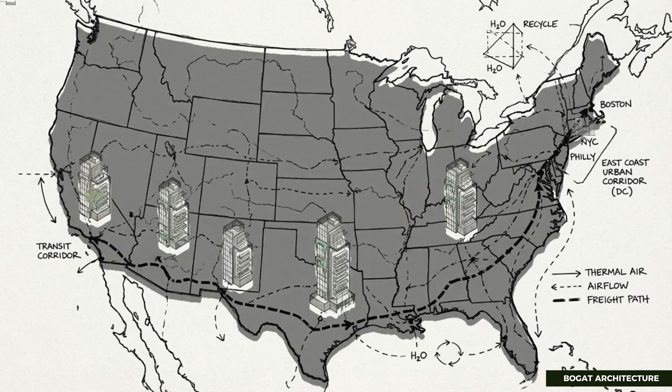Right now, our food system is stretched thin, relying on vast amounts of arable land that is rapidly degrading, and a transportation network that ships produce thousands of miles before it reaches your plate. We are running out of horizontal space, but as architects, when we run out of space on the ground, we look up. What if the skyscraper of the future wasn't just housing or offices? What if our buildings could feed us?

Today, we are looking at one of the most provocative shifts in urban design history, the rise of the vertical farming city. Hi, I'm Maria, an architectural designer and founder of Bogat Architecture and Design, and today we'll explore vertical farming cities feeding future generations.

So, to understand why this architectural typology is so critical, we first have to look at the flaw in our current urban design. For the last centuries, city planning has been defined by separation. We have residential zones, commercial zones, and industrial zones. Agriculture was pushed far to the periphery, out of sight and out of mind. This separation has created a massive logistical burden.

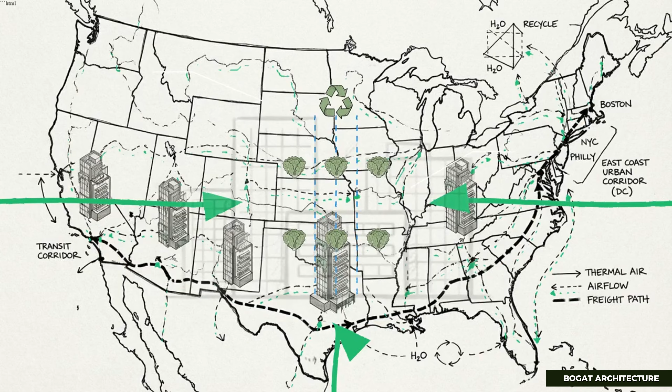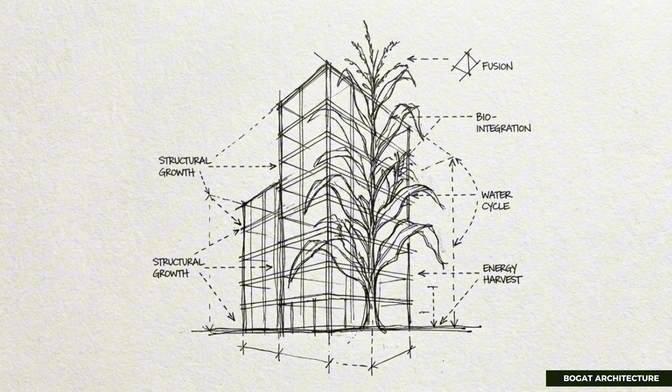The average head of lettuce in the United States travels 1,500 miles to get to the consumer. That is a tremendous amount of fossil fuel, packaging waste, and spoilage. From a design perspective, our cities are consumers. They devour resources like food, water, energy, and they export waste. They are linear systems. The concept of vertical farming is an attempt to turn the city into a circular system, something that acts more like an ecosystem.

We call this agritecture, the seamless fusion of agriculture and architecture. It's not just about putting a few tomato plants on a balcony. It's about integrating high-yield, industrial-scale food production into the structural DNA of our high-rises. It challenges us to rethink the purpose of the building envelope and the mechanical heart of our structures. But before we talk about the building itself, we have to understand the technology inside, because form follows function.

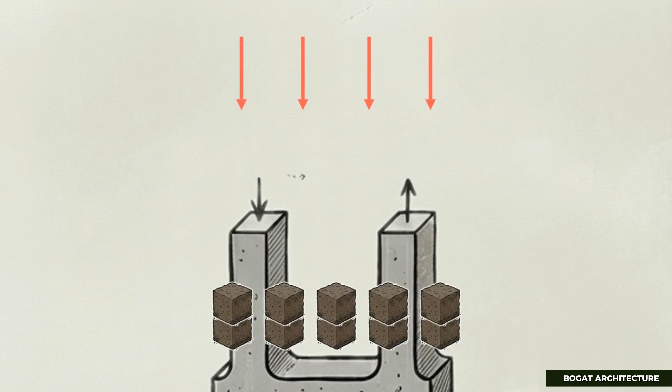If we are designing a vertical farm, we aren't using dirt. Soil is incredibly heavy. Saturated soil can weigh from 100 to 120 pounds per cubic foot. If you tried to fill a 40-story skyscraper with 3 feet of topsoil on every floor, the structural requirements would make the project financially impossible. Instead, we rely on 3 main methods, each dictating a different architectural approach.

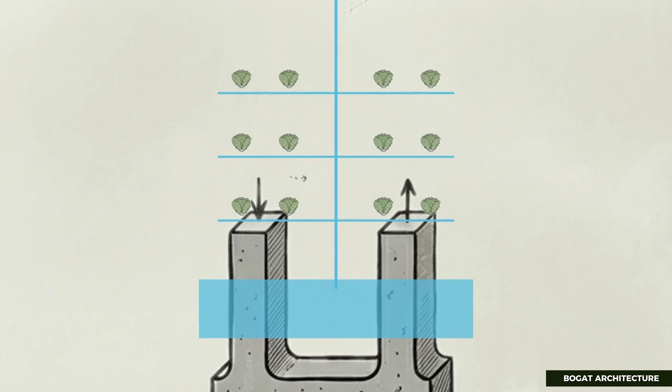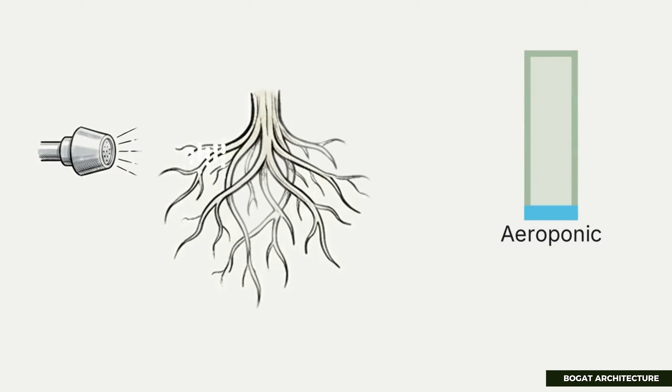First, there's hydroponics. This is growing plants in nutrient-rich water. From a design standpoint, this means the building becomes a massive plumbing system. We're dealing with pipes, reservoirs, and pumps on every level. Second is aeroponics. This involves misting the roots of plants suspended in air. It uses 95% less water than traditional farming, which significantly reduces the dead load on the building structure. However, it requires sophisticated humidity control systems.

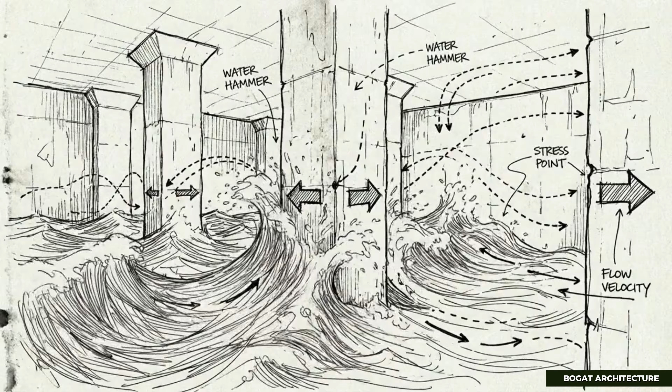Third is aquaponics, a symbiotic system where fish produce waste that feeds the plants, and plants clean the water for the fish. This creates a live load issue. Water tanks are heavy and they move, so you need reinforced concrete slabs and careful distribution of weight.

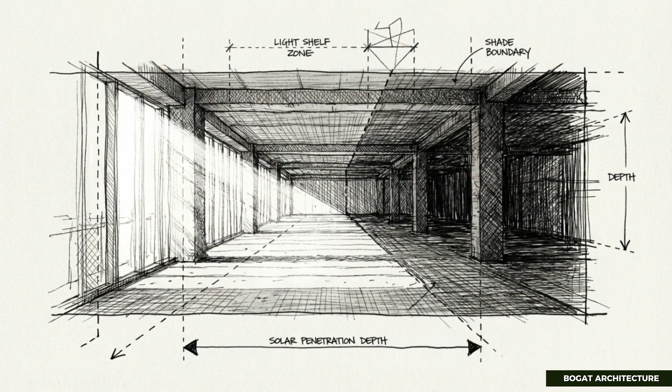Now let's put on our architect hats. The biggest challenge in designing a vertical farm isn't the water, it's the light. In a traditional field, the sun does all the work for free. In a skyscraper, we have a geometry problem. Most commercial towers have deep floor plates. The distance from the window to the core might be 30 to 40 feet. Natural light only penetrates about 15 feet into the building effectively.

If we rely solely on glazing, glass facades, only the crops on the perimeter will grow, and the crops near the elevator core will die. So we have 2 architectural solutions here. The first solution is to change the shape of the building. We can design narrow towers or towers with high surface area to volume ratios.

Think of shapes like a thin rectangle, a cylinder, or even a cross shape; it maximizes natural light penetration. The second solution, and the most common one currently, is a closed system relying on artificial lighting where we use LED spectrums, pinks and purples that target the exact photosynthetic needs of the plants.

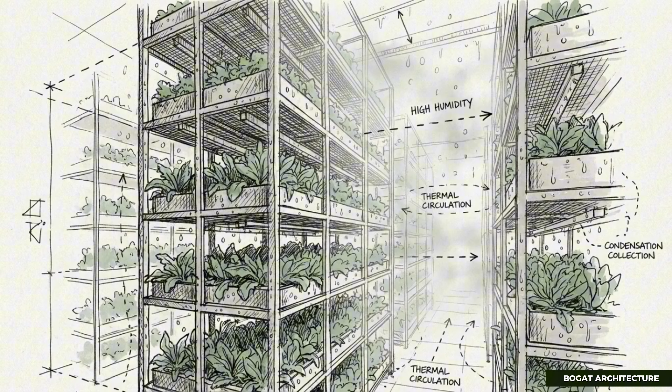This changes the building envelope entirely. If we use LEDs, we don't need windows. In fact, windows might be a liability because they let heat in or out. A vertical farm relying on LEDs might look more like a brutalist monolith or an opaque insulated box rather than a glittering glass tower. Now let's talk about the invisible architecture, the HVAC systems, heating, ventilation, and air conditioning.

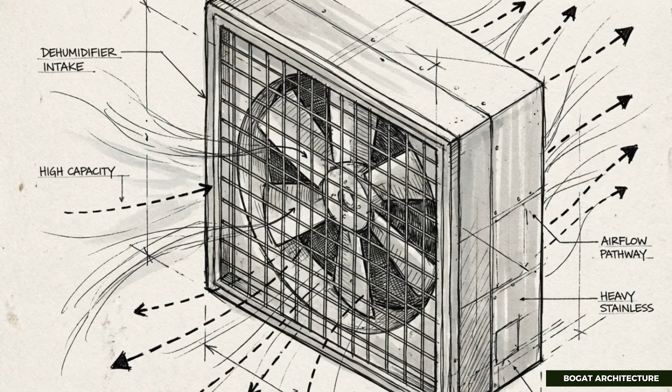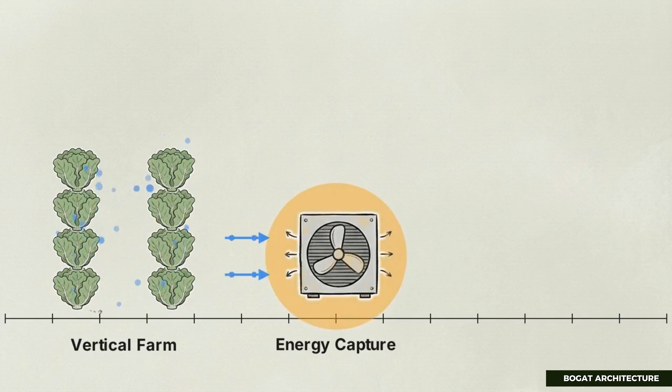In a standard office building, we are managing the heat generated by human bodies and computers. In a vertical farm, we are managing transpiration. Plants release moisture vapor. A dense indoor farm is essentially a jungle. It wants to be 100% humid. But high humidity breeds mold and structural rot. It can corrode steel connections and damage concrete over time. So the mechanical engineer and the architect have to design massive dehumidification systems.

This actually presents a unique opportunity for energy recycling. When you condense water vapor out of the air, you recapture heat. The heat can be used to warm the building in winter or even be pumped to adjacent residential towers in a mixed-use district. The building becomes a thermal battery.

I mentioned weight earlier, but let's dive deeper into the structural engineering. A standard office building is designed for a live load of about 50 to 100 pounds per square foot. This accounts for desks, people, and partitions. A vertical farm, even one that is using aeroponics, has a much higher load density. You have racking systems that might go 20 feet high on a single floor, water tanks, harvesting robots. That means we have beefier columns and thicker floor slabs.

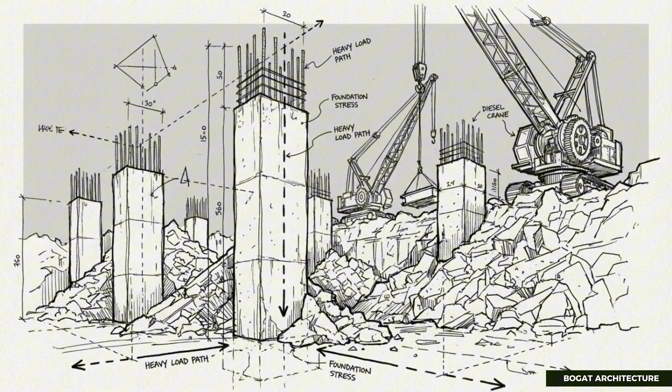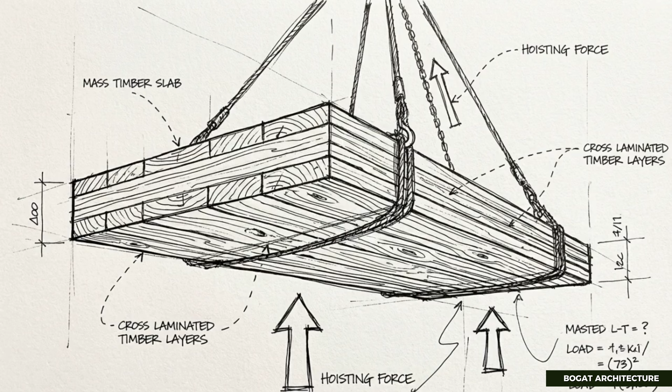This increases the embodied carbon of the building, the amount of concrete and steel we use to build it. This creates a tension. We are building an eco-friendly farm, but we are using carbon-intensive materials to support it. So to solve this, architects are using timber. Mass timber or cross-laminated timber is strong, lightweight, and carbon sequestering. A mass timber vertical farm would be the ultimate expression of sustainability, a building made of plants, growing plants.

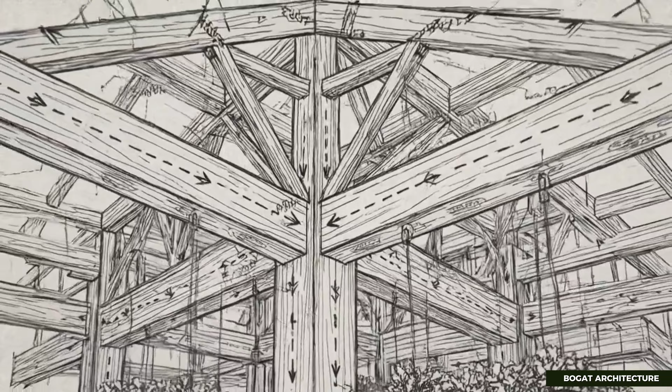So is the future a tower that is 100% farm? Probably not. The economics are difficult. Real estate in cities like New York, London, or Tokyo is expensive. Lettuce is cheap. So if you build a skyscraper on a plot of land worth 50 million, you cannot pay the mortgage by selling basil. This is where the mixed-use typology comes in. This is the sweet spot for architects.

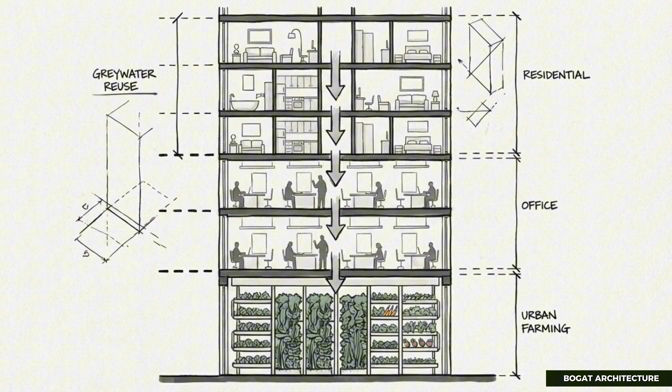Imagine a 60-story tower. The bottom floors, which are shaded by neighboring buildings and have low rental value, are dedicated to vertical farming. The middle floors are offices. The top floors, with the best views and light, are residential luxury apartments. In this scenario, the farm acts as a utility for the building. It provides fresh food for the residents, which is a premium amenity.

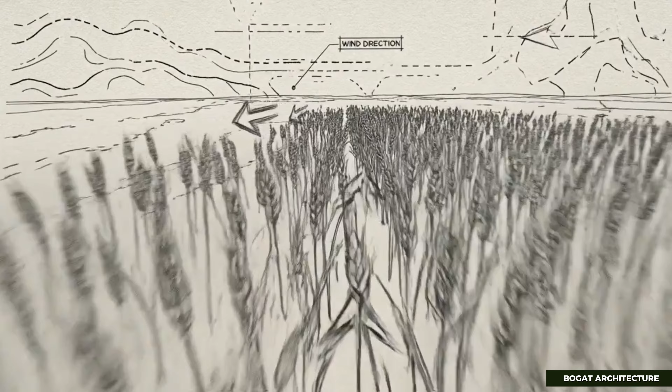It filters the air for the offices, and the gray water from the apartments, like showers and sinks, is treated to be used to water the crops. This is architectural symbiosis. The building functions as a closed loop. The waste of one tenant becomes the resource of another.

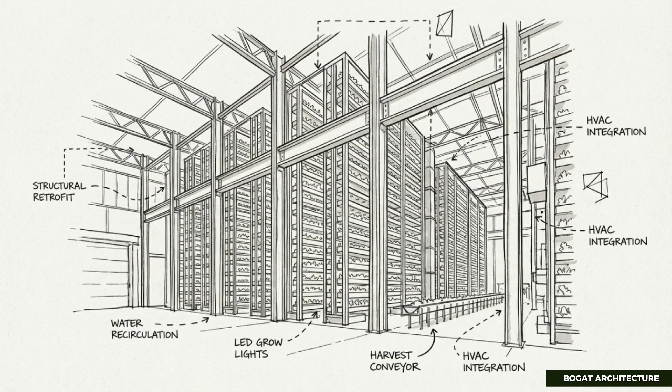Another fascinating design direction is the productive facade. Instead of hiding the farm inside, we wear it on the outside. We've seen this with Stefano Boeri's Vertical Forest in Milan. While the project focuses on trees for biodiversity and shade, the principle can be adapted for food.

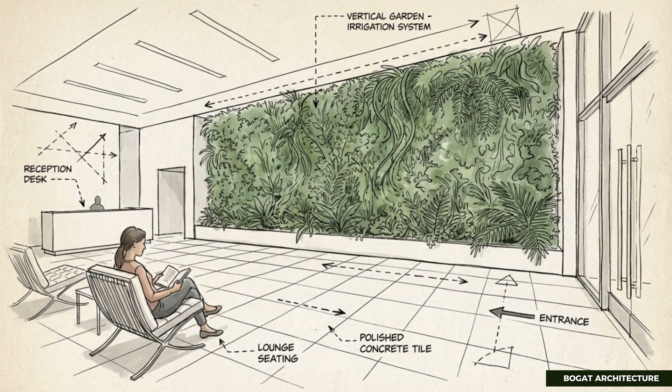Imagine double skin facades, two layers of glass with a walkway in between. In that thermal buffer zone, we can grow crops. This acts as insulation for the building, reducing heating and cooling costs while producing food. It transforms the visual identity of the skyscraper. Instead of a static gray skyline, we get a living, changing green skyline that shifts with the seasons.

However, this comes with maintenance challenges. You need window washing units that are actually harvesting units.

You need to ensure high winds at 500 feet in the air don't strip the crops. It requires aerodynamics modeling to ensure the plants can survive the microclimate of the upper atmosphere.

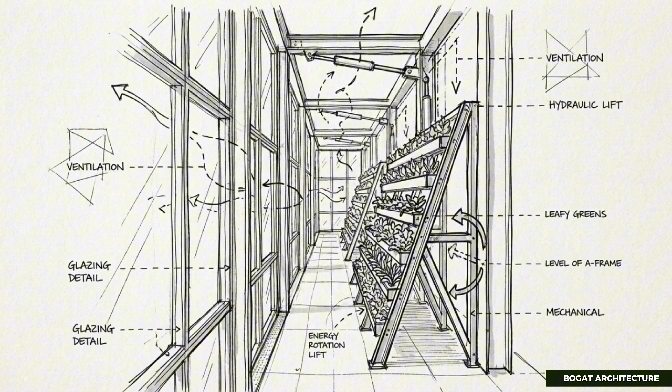Now let's look at where this is actually happening. Singapore is the current world leader in this space. They are an island nation with very little land, so they have developed SkyGreens, a low-carbon hydraulic rotating system, which is basically an A-frame structure that rotates tiers of plants. And as they move up, they get sunlight. As they move down, they get watered.

On the other side of the spectrum, we have AeroFarms in Newark, New Jersey. This isn't a skyscraper, it's adaptive reuse. They took an old steel mill and converted it into the world's largest vertical farm. This is perhaps the most sustainable approach, retrofitting existing abandoned industrial stock.

As architects, we love adaptive reuse. It revitalizes blighted neighborhoods without the carbon costs of new construction. It turns a Rust Belt relic into a futuristic food hub.

But beyond the engineering and the economics, we have to talk about the human experience. Biophilia is the hypothesis that humans have an innate tendency to seek connections with nature. We feel better when we are around plants. Our cortisol levels drop, our productivity increases, and our mental health improves. Bringing farming into the city isn't just about calories. It's about reconnecting urbanites with the biological process.

Now imagine a residential tower where the lobby isn't just a marble desk, but a hydroponic garden where you pick your salad for dinner. Imagine schools located inside vertical farms where children learn biology not from a textbook, but by managing a crop cycle. It softens the harshness of the urban environment. It reintroduces seasonality to a city life that often feels disconnected from time.

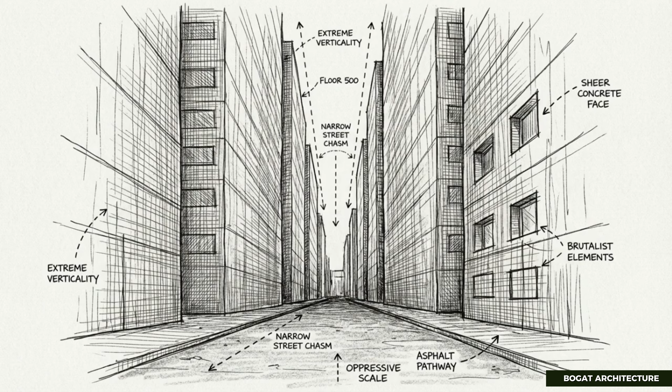Now, of course, I don't want to paint a utopian picture without addressing the hurdles. The biggest barrier remains energy. Even with efficient LEDs, replacing the sun is expensive. Depending on the local energy grid, a vertical farm could actually have a higher carbon footprint than a traditional farm if the electricity is coming from coal or gas. For vertical farming to be truly sustainable, it must be paired with renewable energy: solar, wind, or nuclear.

There is also the issue of crop variety. Right now, vertical farming is great for leafy greens, herbs, and microgreens. It's not currently viable for calorie-dense staples like wheat, corn, rice, or potatoes. You need too much space and too much time for those crops. So vertical farming won't replace traditional agriculture entirely.

It will supplement it. Looking forward, the vertical farm will likely become a node in the smart city network. Imagine sensors in the farm communicating with the city's power grid, turning on the lights only when the energy demand in the city is low to balance the load. Imagine autonomous drones delivering the harvest from the farmscraper directly to the balconies of apartments within a 5-mile radius.

The role of the architect here is to design flexibility. We need to create long-life, loose-fit buildings, structures that are robust enough to handle the load of the farm today, but flexible enough to be converted into housing or offices 50 years from now if the technology changes.

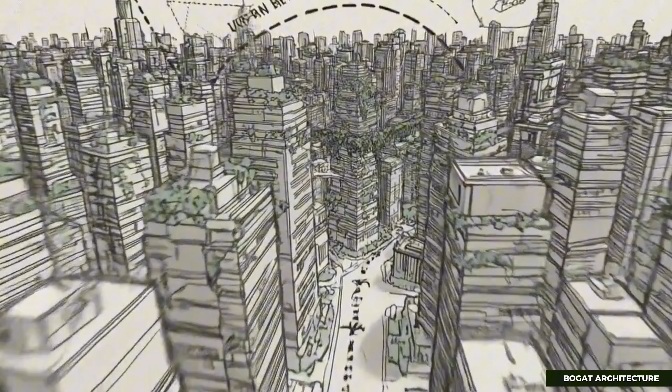Vertical farming cities represent a fundamental shift in our relationship with the built environment. For thousands of years, we built walls to keep nature out. Now we are designing structures to invite nature in. It is a typology that demands collaboration between architects, botanists, engineers, and data scientists. It asks us to view the city not just as a place to live, but as a living thing itself, an organism that consumes, metabolizes, and produces.

As we face the challenges of the coming decades, these productive towers might just be the key to resilience, ensuring that no matter how dense our cities become, we are never too far from the source of our sustenance.